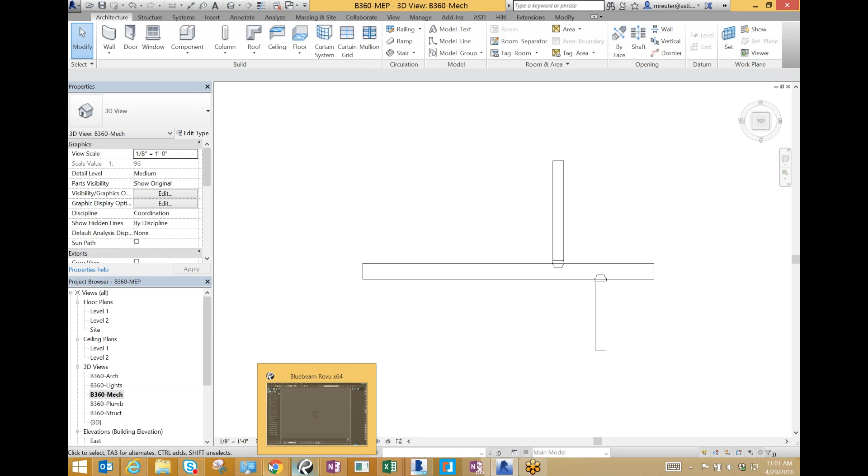Definitely not 80, and it's all clouds. Ah, it's that Midwest springtime, I got it. Yeah, it feels more like October than it does almost May. Nice.

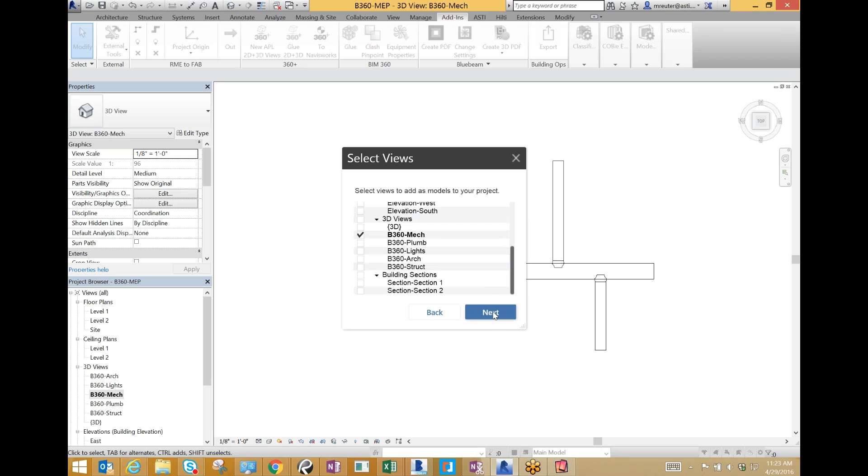Okay, so here's where we're going to start. I've just got a really basic Revit model here. We're starting in Revit, and I'm going to go up to my add-ins and push this model to glue. I'm going to select my project, then select the view I want to update - I could select as many or as few views as I wanted. In this instance, I'm just looking at the mechanical model, so I just want to push that mechanical model up. I'll hit next here. Okay, got it in there - I've uploaded it before so it remembers it, it's in this folder. Last time I glued it was last Friday, around this time. So I'm just going to hit glue.

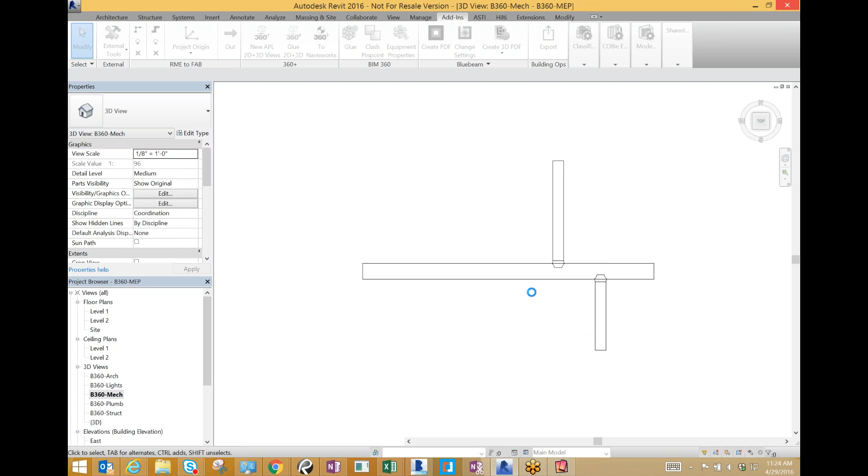So while I'm doing that, it's going to ask me if I want to update it or create a new file, and I want to update it because I want to see the changes in my model from the previous time.

Okay, so it's working pretty quickly. It's going to tell me as soon as it's complete. Okay, so I've already got Glue opened up here.

A little bit about it, like I said, when I open up my model, you're going to see that it works a whole lot like Navisworks does.

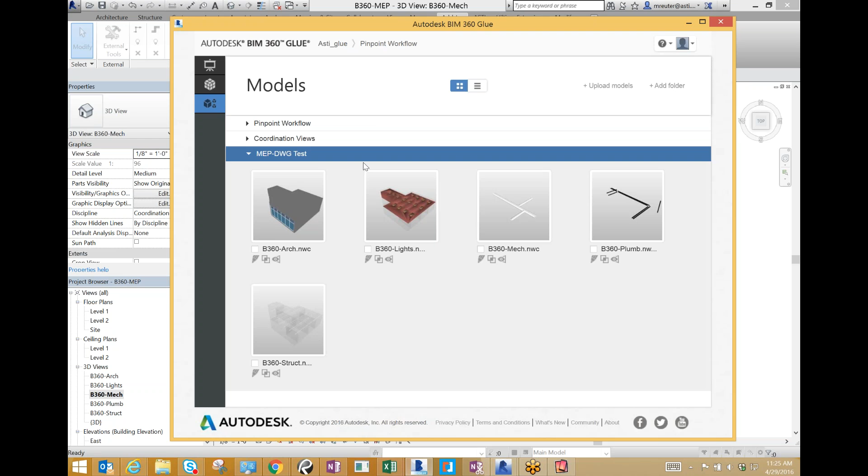Okay, right here, basically what you do is you upload your models, and you could actually see it going on right there, I'll show it to you. You upload your models either by the Glue button or manually, and then what you do is you create a merge model.

So if you guys are familiar with Navisworks, you can think of the models as basically your NWCs or your CAD files, or basically all of your attachments that you append to your final NWF file or NWD file. Okay, so the NWD or NWF is like right here, the merged model.

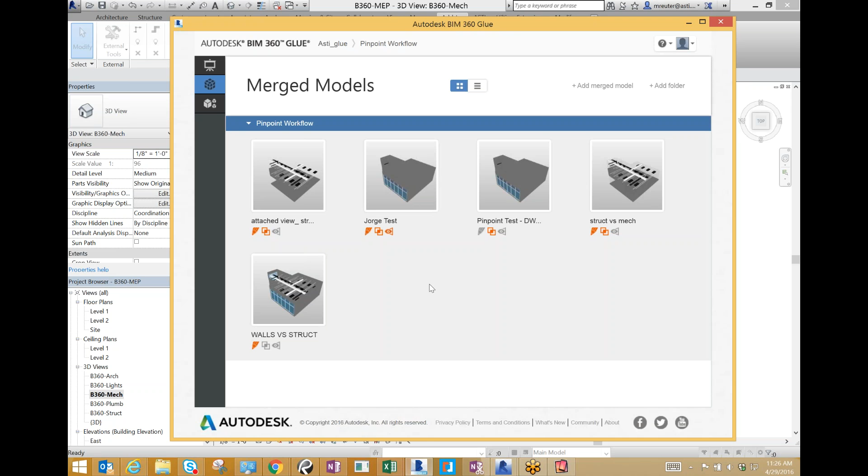So I'm going to hop into this one, right here into this model.

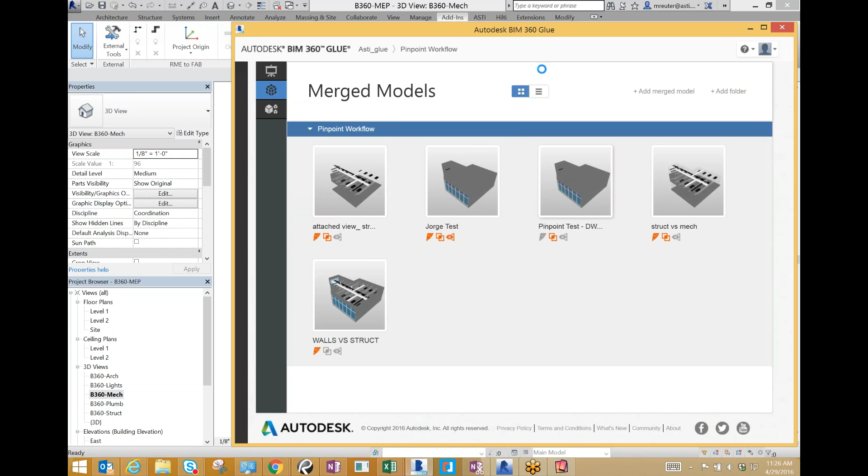Okay, and I apologize for the latency right here. Glue tends to go a little bit slower when I'm also screen sharing.

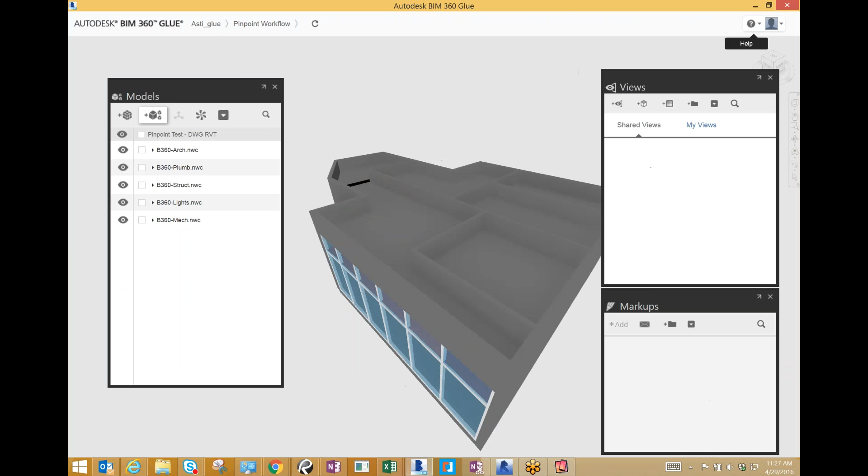Yeah, we got a little bit of inception going on. I think that it's probably mostly because I'm running this right now on a Surface, so it could be that I've got a whole lot of things going on with it. But anyway, sorry, go ahead Brian. What were you saying? No, it was just a horrible joke. I just was saying it was like Inception, a thing inside of a thing inside of a thing, and it slows down a little bit.

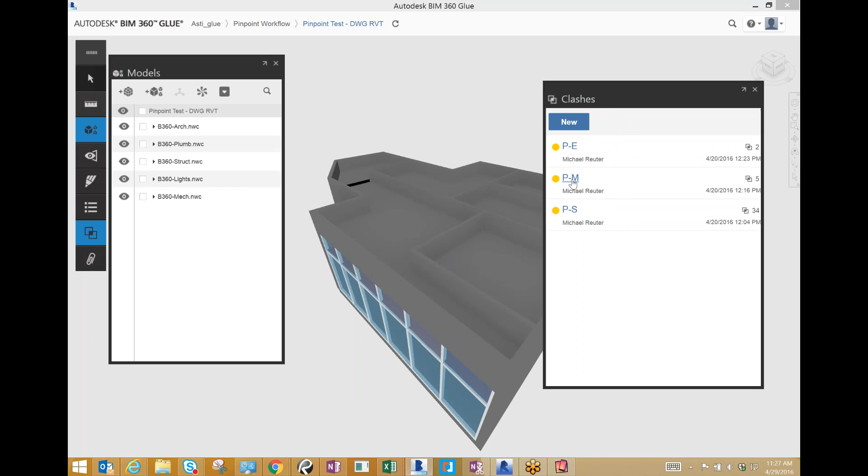But the other lag that happens too, in my former sales life, I did a lot of marketing. When you do something over GoToMeeting, it's not a streaming video, it's a series of pictures that's just rapidly done. If you look at like an old school movie where you would flip the pictures that made stuff move, so when it comes to sharing video it lags a little bit as well. It's trying to catch up, so it pushes the audio before it pushes the video portion. So sorry about the delay, guys.

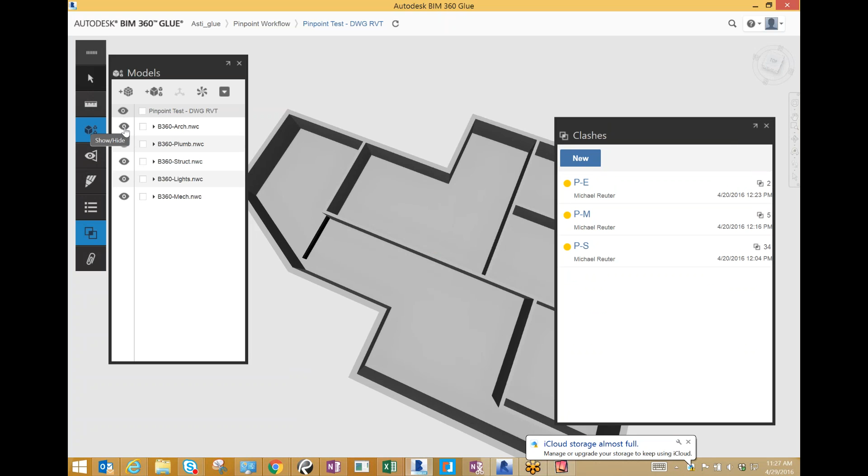So, okay, so right now you can see I opened up my model. It looks pretty similar and functions pretty similar to Navisworks. So if you're used to that, then it works and looks pretty similar, okay?

So what I've actually done is I've opened up a clash report. And so what I'm just going to do real quickly is I'm just going to run another one, okay?

Pardon me. Okay, so I opened it, may have to refresh here. I just saw that it... okay, so right now you can see that I updated the model. I guess I opened it before it was ready, so we'll just hit refresh.

And so basically right there, that was a perfect example. Okay, so I updated the model, and as soon as the model was completely updated, it gave me a little notification up here in red or orange, telling me that I needed to refresh the model. So I hit refresh, and then inside of a minute, it updated everything.

Okay, so let's update our results right now for our clash report.

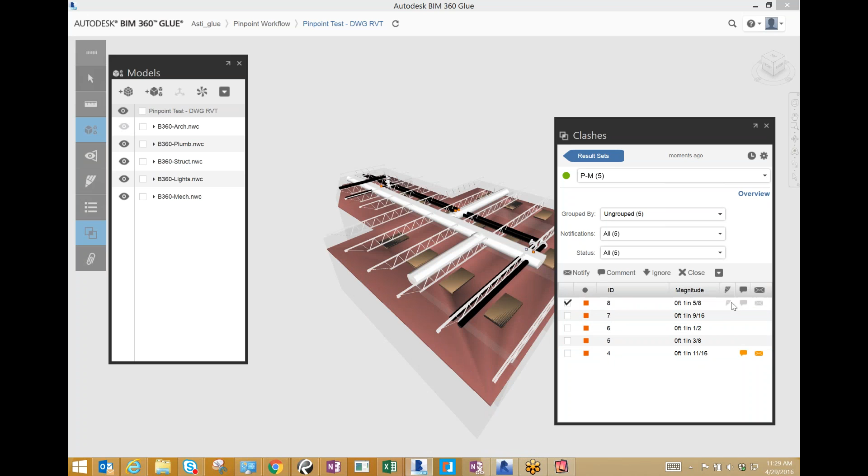So let's just hide that. Okay, so what I'm going to do is just make a markup and create a notification that I want this specific one changed. Okay, so when I click on the clash, it zooms right into it.

So I've added a markup, so I can mark it up pretty easily. Okay, so then you can add text, you can add arrows, you can delete things, you can make circles or whatever. You can even change the color of your markup.

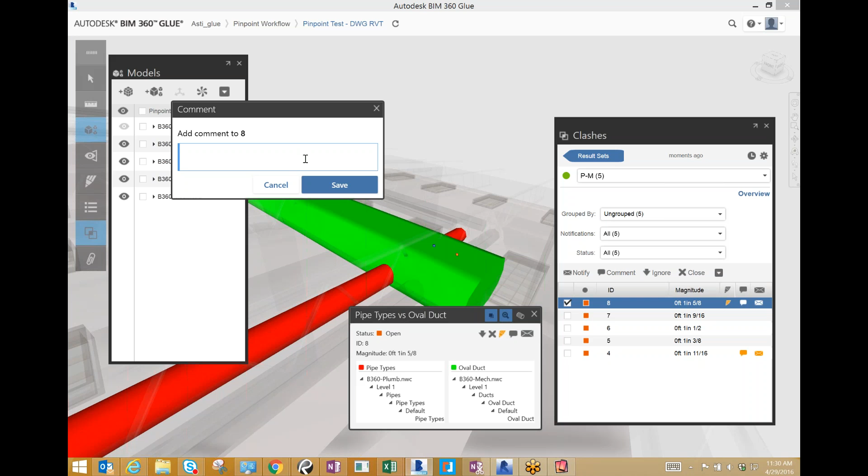Pretty simple. Okay, so right there you can see with that clash it's saved. So I'm gonna also make a comment, and the comment's gonna be, okay. So now the next thing I'm going to do is I'm going to actually notify myself of the issue. So what's cool about this is that it's going to send me an email about it, and it's really fast about it.

So that's pretty cool. It's going to send me an email, and then when I go into the email, I can click on it, and it's going to send me right back into this location in the model. That's pretty cool. See, there you go. There's the email, right? But what I think the really powerful tool is Clash Pinpoint with it.

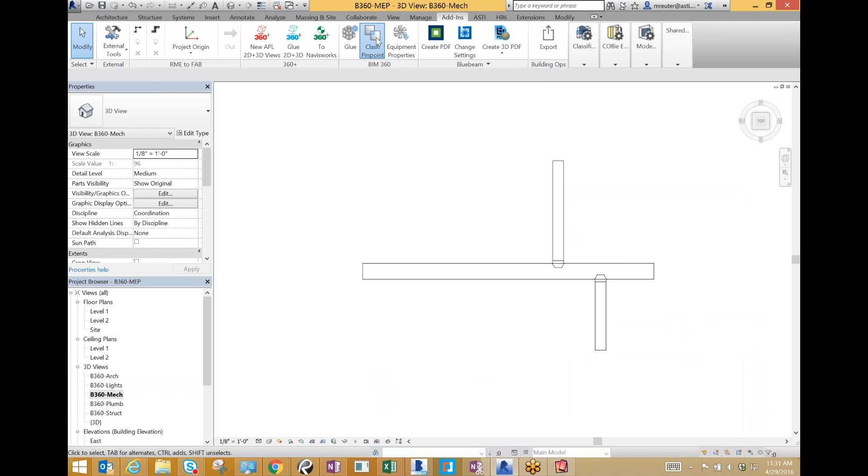Okay, so I'm going to come back into my Revit model. I'm going to hit Clash Pinpoint. So I'm just going to select this clash result set right here, which is the one that we just did. You can see it was just done 2 minutes ago, so I'm going to hit View. When I hit View, you can see I've got 2 different clashes in there, one that was old and then one that we just did, number 8. So you can see number 8, I sent that along.

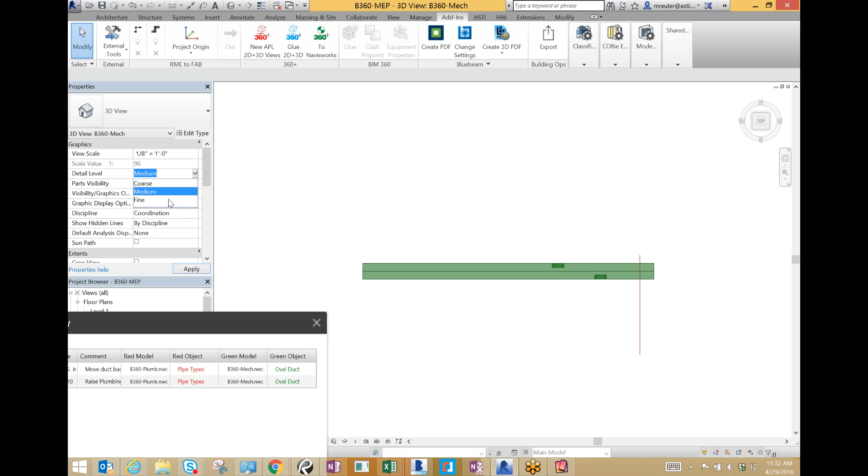So when I click on number 8, I just select View Selected, and what it does is it shows, let me get it fine, the actual, okay, great. So what you actually see here is the 2 items that are clashing. Right here, it's showing me that the ductwork and this piece of plumbing are clashing. So what I can do then, oh, sorry, my iPad went to sleep, is actually select that item that I wanted to move. Because remember, the direction that I said was to move duct back to miss the plumbing.

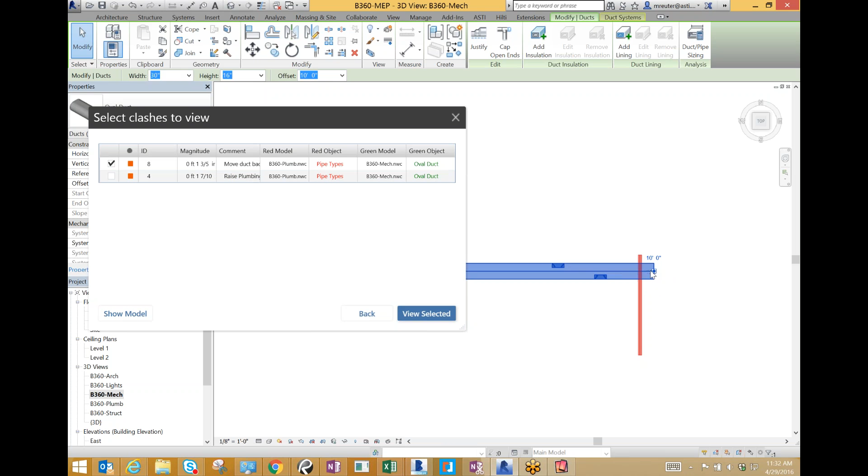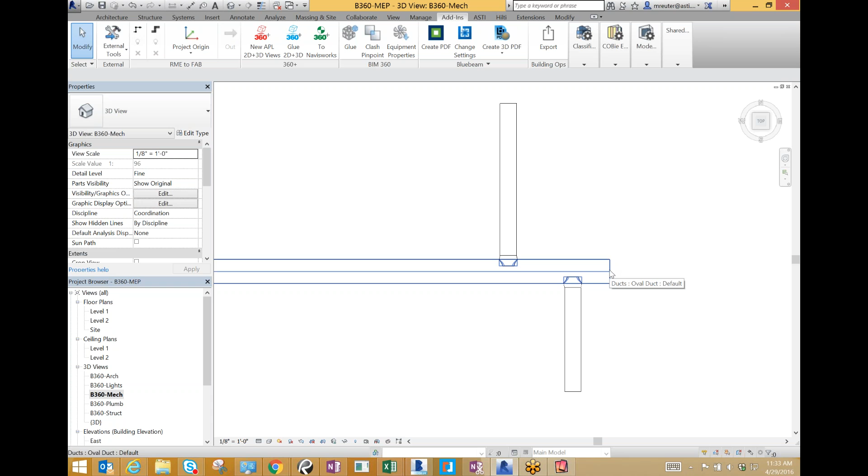So then if I were to just go in there and Glue this again after I made that change, it'll show up. So to review with Glue: when I was doing coordination, the one most consistent response that I got was when I asked, why didn't this clash get done this week? And the response from just about every sub was, well, I didn't know what the mechanical guy was going to do here. I didn't know what the electrical guy was going to do here.

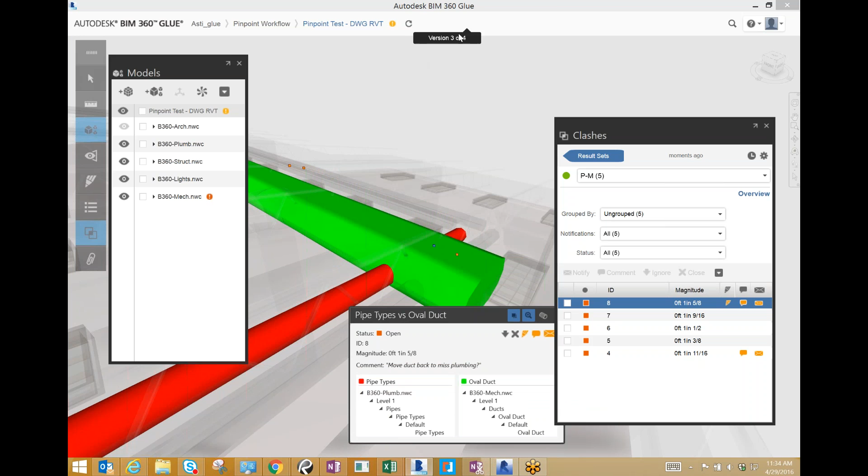And so they waited until the next week to see what that electrical guy was going to do or what that mechanical guy was going to do. So the whole process got slowed down because people were waiting on updates. Well, with Glue, you can be working in basically your Navisworks model all the time. So you see the yellow exclamation point? You just hit this refresh button right here.

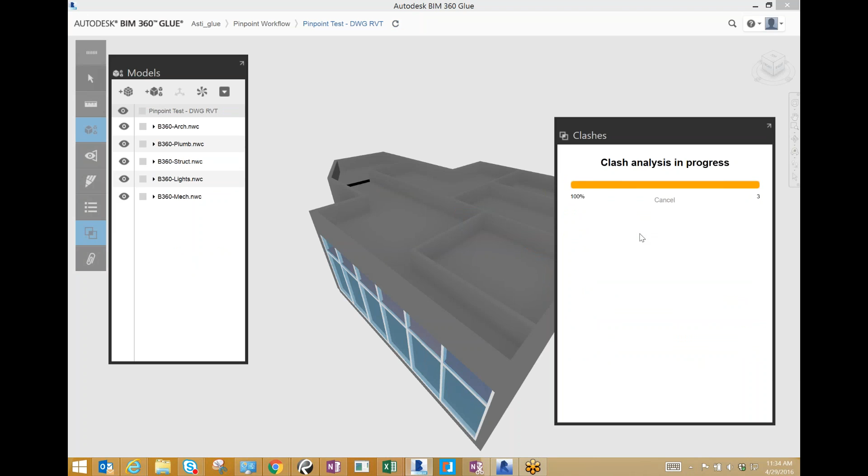It updates your model, and then you can even go and update your clash result set. And so what you can see is number 8 and number 4. It shows me that my revision resolved those clashes, and furthermore, it didn't even create new ones. So that's basically the power of it. Something that would take a week for someone to look at can take them maybe 10, 15 minutes tops. So something that took a week now could take 10 minutes. Okay, so that's Glue.

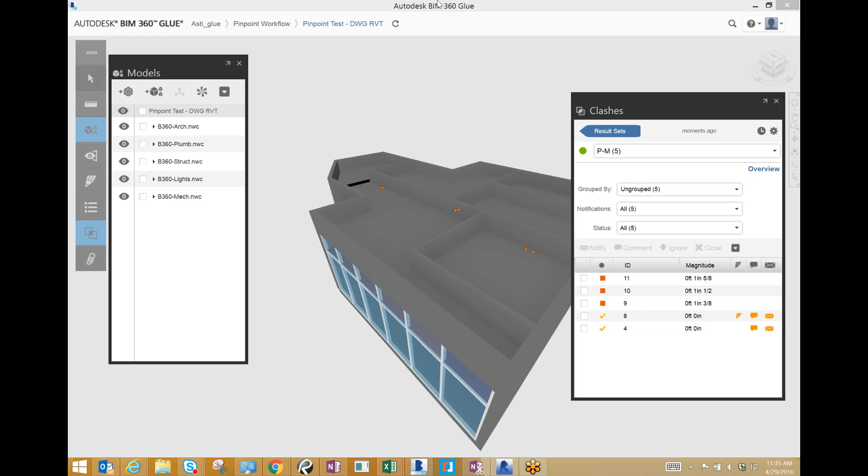Do you guys have any questions? No, I mean, it looks like Navisworks. Do you set it up in Navisworks first, or do you just set everything up here in Glue directly? Great question. So I'll go back to it. You can. It's a pretty simple process. You just set up your Glue project, and then let me go down to right here. Okay.

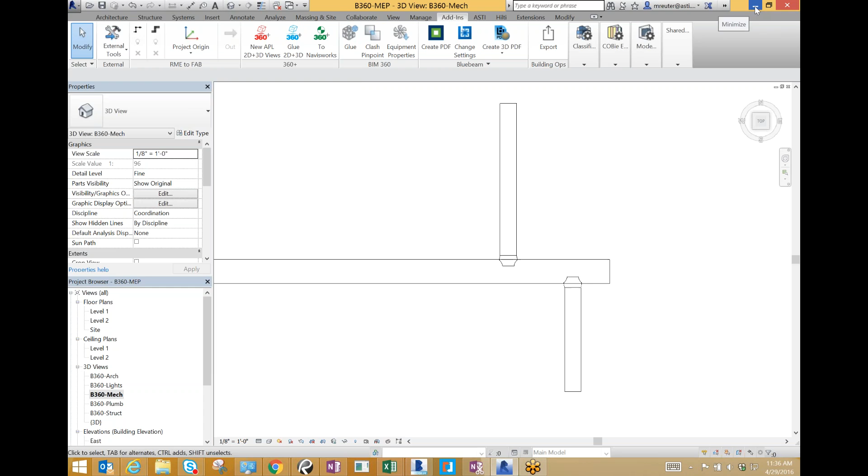You set up your Glue project, and then basically just like I showed, if you're using Revit or AutoCAD or fabrication or any of those other Autodesk products, it's really just as simple as selecting, hitting the Glue button and then finding your project, okay? Or you could just manually upload your models, so you could just hit upload, drag and drop them in,

and it's done, okay? So then what you do is you create a merged model, which is basically appending all of your models in Glue. It's just like the process you would have done in Navisworks, but instead you're in Glue. So is it easier to just say that Glue is basically Navisworks online? Yeah, that's as simple as you can make it, more or less. It doesn't have all of the functionality that Navisworks has. It's the Navisworks clash tool online.

Okay. Brian, this is John with Autodesk. The best way to look at it really is Navisworks is still going to do the heavy lifting of your coordination. But what Glue does is it provides basically a central repository for all those models, and it is the traffic cop from a communication standpoint for those models. And it also provides access to those models out into the field.

So Frank, instead of using the lightweight viewer app, you would possibly have a full license of Glue, and it will allow him to leverage more of the functionality of Glue, not just as a viewer, and be able to communicate back to that central hub, if you will, and then again leverage Navisworks for your heavy lifting.

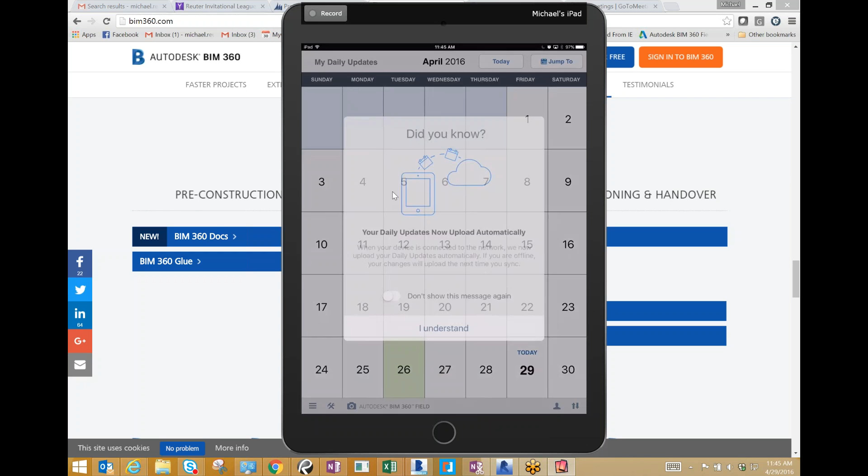Now I'll really quickly get into it. I'm just going to show you guys basically two things: issues and daily updates. Is there one that you want to see first, or does it matter? Either one would be fine on my end. Okay, I'll just start with daily updates. So let's just start with today. I just tap on the screen.

What is your location right now? You can just use 60622. Okay, so when I put in your zip code, it automatically populates all of the weather information for the day. So you've already got that done. Now let's say there was a rain event at 2 o'clock. Yes, please. So you just hit the notes and you type it in. Okay.

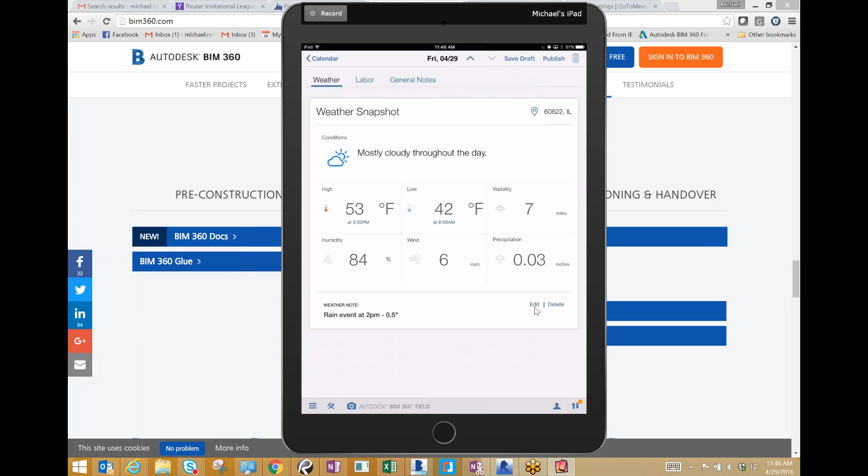Next, you can go over here to labor and manpower. So you put in the company name, and then you say how many workers were there today. Let's just say 7, and they worked 8 hours today, and you hit calculate. So it actually calculates the work hours for you. Then you can even go in and give notes as to what they did. Did this, worked on that, finished those.

So basically, it's everything that you've got in your current system. I worked with Walsh, so we also used CMIC, and we had a template that asked for all this same information. So you could go on down the line with all of your subcontractors, saying what they did for that day.

Now, if you look up here, you can copy this from a previous update. So let's say for the whole week, more or less the same amount of subcontractors are going to be on the site. You don't have to fill this stuff in every day. You just say copy from previous update, and it takes all that stuff in there, and then you can just modify the workers and the hours. Okay.

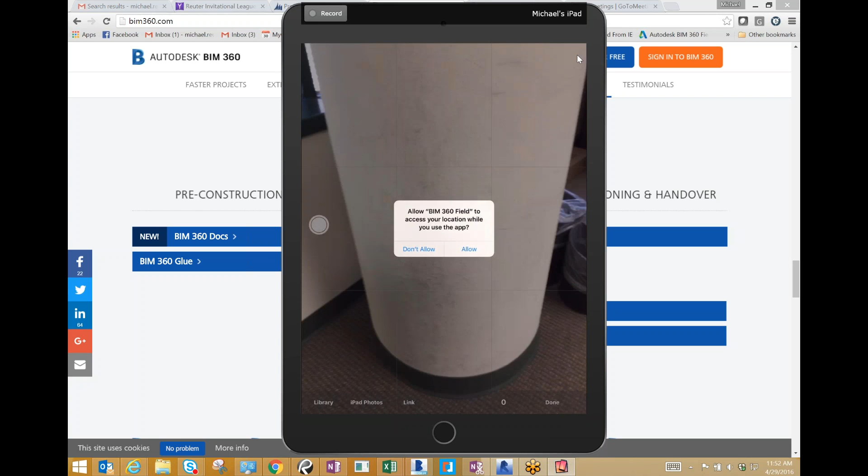So let's just say we're walking the site and we saw an issue. The issue is that we need to touch up paint. So I'm going to go here and take a picture of the issue. You can see on this column, the paint obviously needs to be touched up before we turn it over to the owner. So I'm going to come back in here and mark up my picture.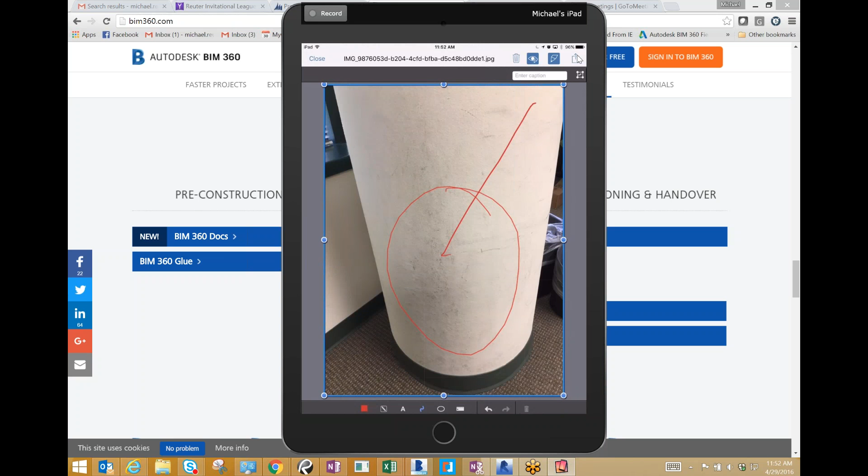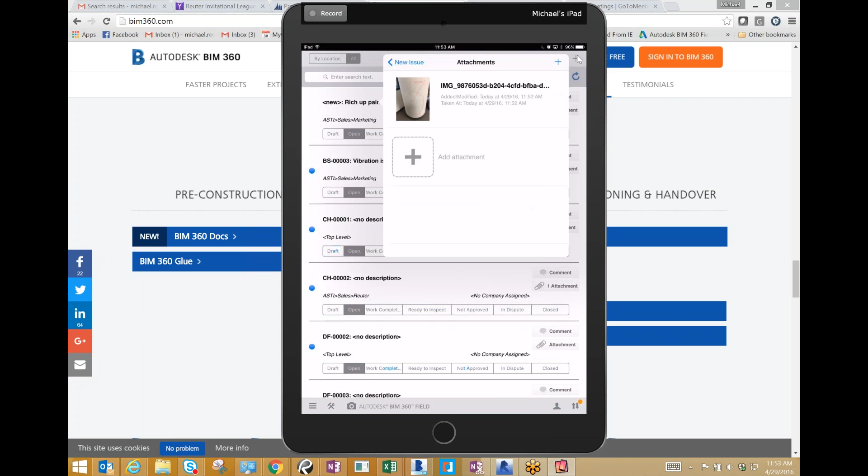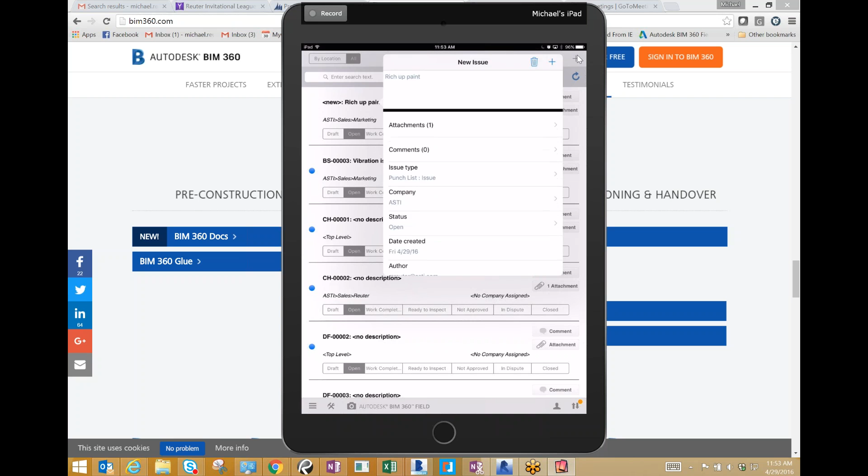Okay, so I've got that done, I've got it closed. So now I'm going to come in here, and I can just choose the issue type, and then assign the company. I'm just going to assign Applied Software to it, and then because I've got it already located in, I've got my locations located into the marketing area, it automatically locates that for me. So basically, with the tap of your finger you can change all kinds of things.

Oh, also you can change the status of the issue. So basically, think of this as your quality control workflow right here.

So the way you'd use this is you're walking the site, you see an issue, you mark it open, you make a comment on it, then you assign it to the subcontractor. Then the subcontractor comes back, reviews it, and marks it as work complete. Then every week you look at a report, and it says these are all the work complete items according to our subcontractors.

Well, you could add them to it, and then if they signed in, then they could do it. But for me, I'd say I was about 50-50 when I worked on a project - active participants in BIM 360 Field that used it on their iPad and commented on it, and then there was the other half that were not as sophisticated and didn't.

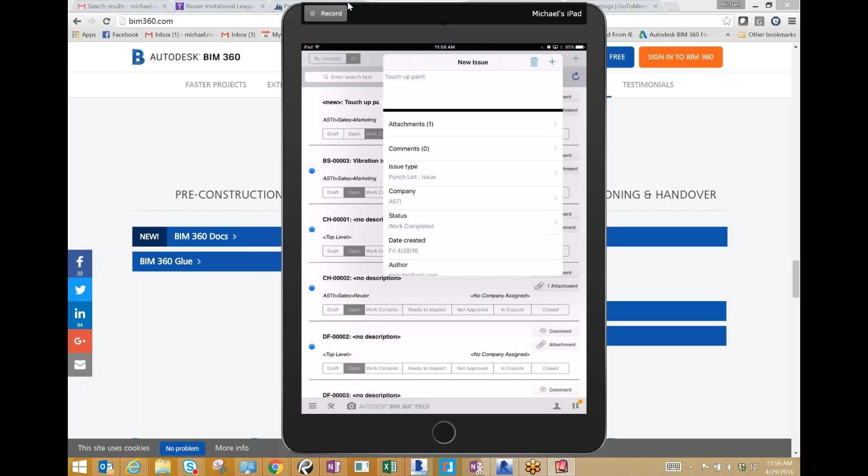So they had just their issues, and it was also organized by location and status, and they could see any of the comments, see the location of it, see a picture of it. Let's see, so right here - actually, let me go to mine, see if it's... okay, so I must not have downloaded my library. Well, yeah, so basically you can locate it. It's just going to make things real easy for you.

I'll actually come in here and create a report on BIM 360 Field so I can show you exactly what you get when you run one. Okay, so open issues for the sub. Great, so I'll just run this right now.

Basically, the beauty of reports in BIM 360 is that you're already gathering this information in the field, however you're doing it right now. So there's really not much time saving as far as generating the issue. It's definitely better because everything's all in one place, but you're not saving a whole bunch of time there.

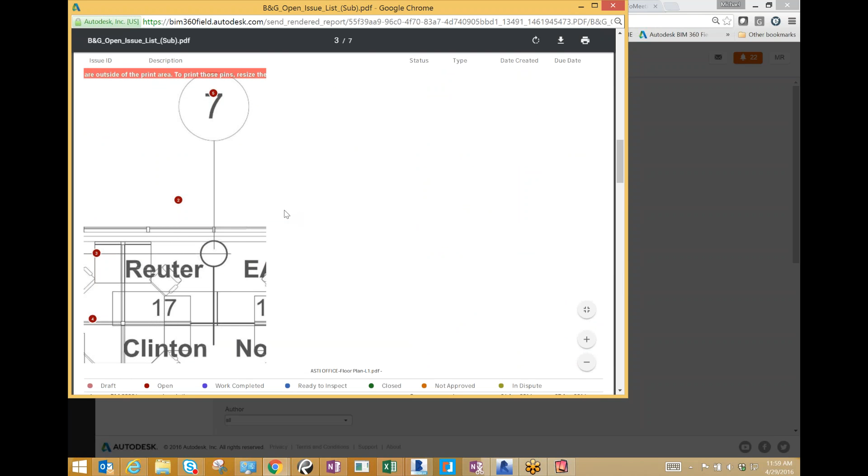So before, when I was doing this, I would have to generate this information all out in the field, and then I'd have to come back in, and then I would have to create something that was presentable in a report and then send it out, right?

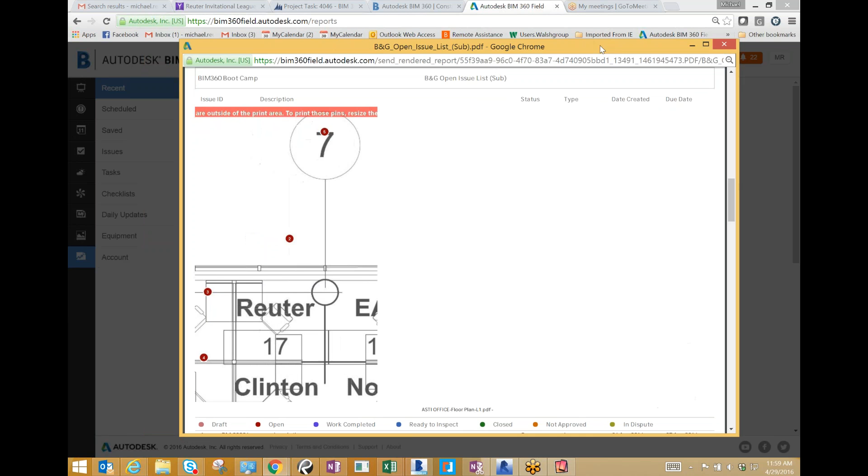Well, you saw, that would take me about a half an hour to an hour, just about every time that I created a report. Doing it this way, it only took about a minute for me to decide what data I needed and then create the report. So it took something that used to be an hour for me to do, and made it minutes. That saved me tons of time.

Frank, do you see now, when we talked before about the process you were doing, how this could shave some time for you?

Yeah, I'm seeing it. Definitely, this could be a much more powerful communication tool when there are issues, instead of having to draw things and take pictures and cut and paste and all that stuff. And I like how it would be able to track the item until I close it.

A lot of times what happens is I'll yell and scream at everybody because they've got a boo-boo, and then I forget about it, and I'll come back at the end of the job and be like, oh crap, I forgot all about that, and now it's buried behind something else, and we've got to take that something else out to get to it. So yeah, this could definitely be very helpful.

The daily report part is very similar to what we're required to do now. But I like how I can do it on my iPad, and just do it right when I'm standing in the field, and not have to go back to my computer and forget everything I thought about throughout the entire day. Yeah, this can definitely be helpful.

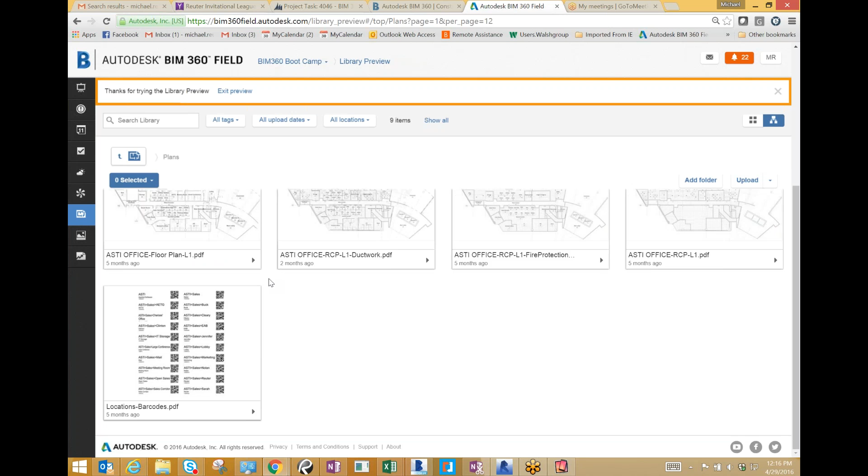Well, I have one question. So once the project's done, is there some way to file it so I can save it on my shared drive and have all the information there, or is it always in BIM and I have to go back to BIM 360 to get it? You can export your project at the end, so Autodesk can help you out with that. Yep, you can absolutely download all the data and have that for your storage locally.

Brian briefly mentioned a solution called Building Ops. If you have an owner you want to share that data with, so they can do some facilities maintenance, there's actually a process to take the data you've created using BIM 360 Field and push that to Building Ops, so your owner would have the information they want or need. It's probably a topic for another discussion.

Brian, I'll send you information on Ops. It's ridiculously cool, and the amount of information, everything you guys have done gets turned over to the owner. I don't know how many calls you get regarding 'this is broken, this doesn't work, the HVAC is out, where's this, where's that?' There's a file room where you have a bunch of files just sitting there, and a lot of times they either can't find it, it's lost, or it takes weeks to get to stuff. They could scan something and know right away the manufacturer, the warranty, who to call, emails, status on it. They can even pull it up where it's at in relation to the model, if there's anything built around it they need to be careful of, like not being able to drill there.